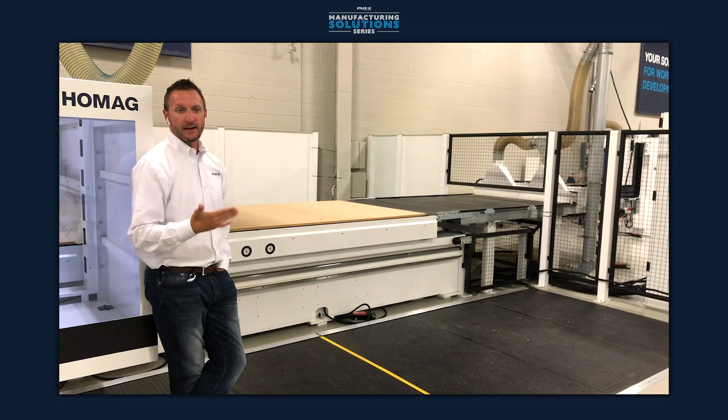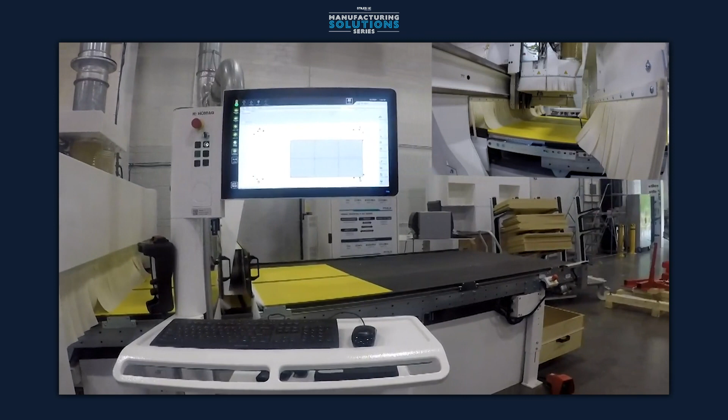The goal of automation on a nesting machine is to, in effect, get the finished parts out on an outfeed table like we see here off to my left and your right. The parts are ejected from the machine automatically. And while that work is being done on the outfeed table, the unloading, the sorting, the dust collection, potentially labeling parts, the machine receives the next sheet and is back in the cut.

Right, so your operator becomes a parts catcher, not so much a loader of the machine, unloading parts and carting while the machine sits idle. So on the other side of that, when we're dealing with the flat table machine and we're wanting to do some 5-axis, if you walk down this way with me a little bit, it's, okay, so how do I work the machine when I'm not working with full sheets? And there are some technologies in this machine that help us do that.

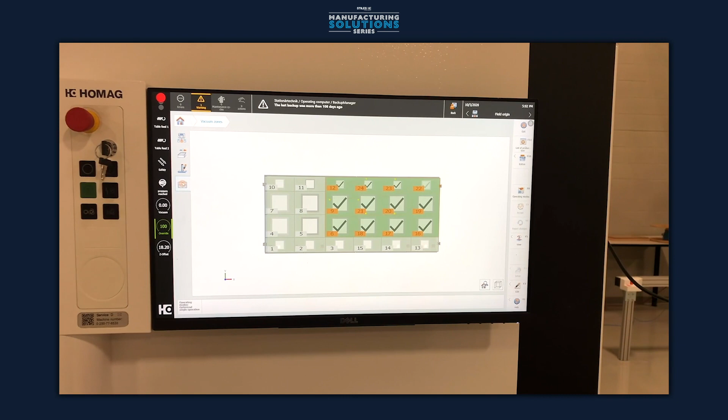If we can zoom in on the machine screen here, you have the ability to work this machine with pods. You also have the ability to fix your parts on the spoil board. So what you see there is a 24-zone matrix table. And the program that we just ran is a 4x8 sheet. Those 3, 6, 9, 12 zones were automatically opened by the machine control. So all of our vacuum is concentrated to a 4-foot by 8-foot sheet.

Let's say, for example, the next part is a solid wood clock face or something of that manner. Small vacuum zone, we would call that program up. We could reference to, let's say, the front left corner of the machine, and only vacuum zone number 1 will open up, allowing all of that vacuum to concentrate to that one zone.

So you can look at this technology as a blend of all of the technology that's taken place with automated or through feed nesting, right? This machine can also be equipped with a scissor lift on the front end to automatically load sheets 1 by 1 or 2 by 2 through the machine.

So what do I want you to take away with this? It is possible, right? High volume through feed type nesting, as well as 5-axis detail type solid woodwork. This N600 machine here is set up for that 80-20 rule, 80% high volume nesting, 20% 5-axis detail work. The demand for high-speed, high-volume nesting and 5-axis technology is growing. The N600 meets those needs.

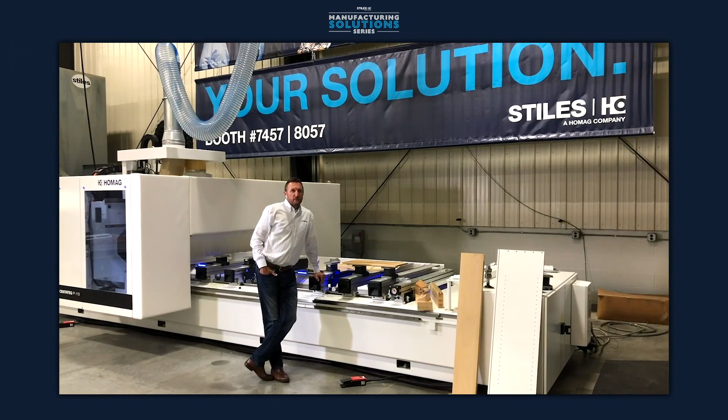What about traditional machining centers? Are we still innovating on those platforms? Let's go back to James Swanson in the other Grand Rapids showroom. Okay, so thanks for traveling with me across the parking lot of the Stiles Machinery campus to our West showroom. We're going to use a little bit of creativity here.

We're standing in front of the Centateq P110 machine, and I want to further talk about the 80-20 strategy that we talked about across the street with the N600 flat table 5-axis machine, right? So we mentioned that machine was set up for 80% nesting with automation and 20% of some of the detail 5-axis type work we see here.

The machine behind us, this is where I need you to be a little bit creative with me. Although this is set up as a pod and rail machine in our showroom, this can also be built or configured with an aluminum matrix table, where we can now put machines into the 20-80 flat table strategy, which would be 20% nesting, meaning I want to do a spoil board on the matrix table 20% of the time, and I want to do things like raised panel door, solid wood entry parts.

A few other examples of some solid wood parts here. We get into corbels and radius handrail work, which we're doing on 5-axis machines, and kind of give you an explanation of why we have two platforms, right? 80-20 nesting with automation and 5-axis as a supplement to the machine.

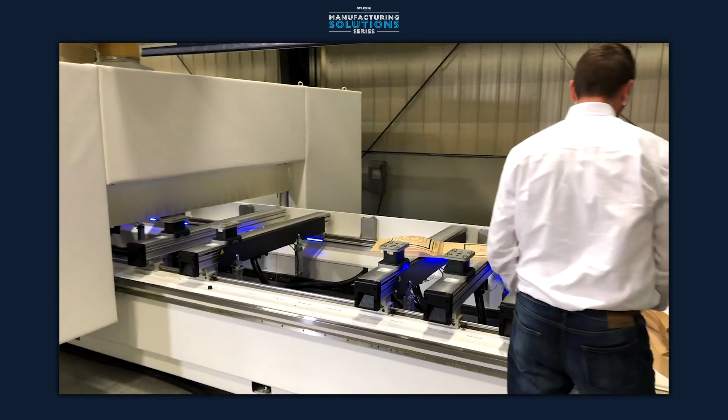So parts, whether it's some of that 5-axis solid woodwork, are coming pre-sized, or at least the large square is cut down to a smaller square, then fixtured to the machine and shaped, drilled vertically, drilled horizontally, pocketed for doing door work, right? That lock mortise type work all happens here on a machine like this.

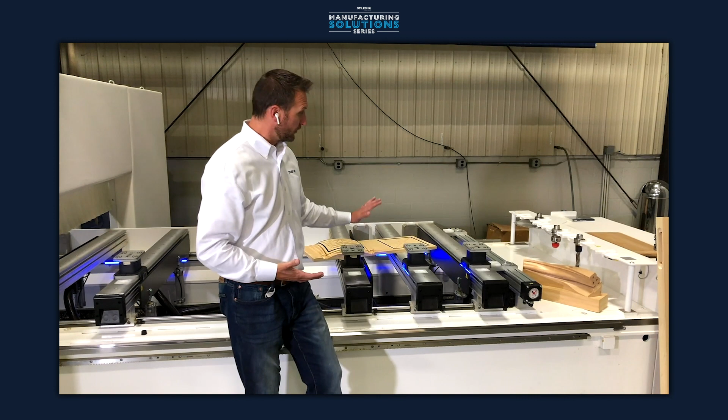In terms of 5-axis, it's kind of what is sexy in the marketplace today, right? But look at a machine like this, available in a 3-axis configuration and a 4-axis with the C-axis and aggregates to do some of that work. But we don't want to forget about our traditional cut and bore market, for which a machining center like this has been the gold standard for many, many years.

So you're looking at a side panel here, right? 8mm construction holes, 32mm adjustable shelf, plus a back groove. That process can happen on a machine like this, where we're working on this side of the table, pendulum processing, while the other side is being unloaded and loaded for the next panel. So you're working in that pendulum priority, and the machine is constantly in the cut.

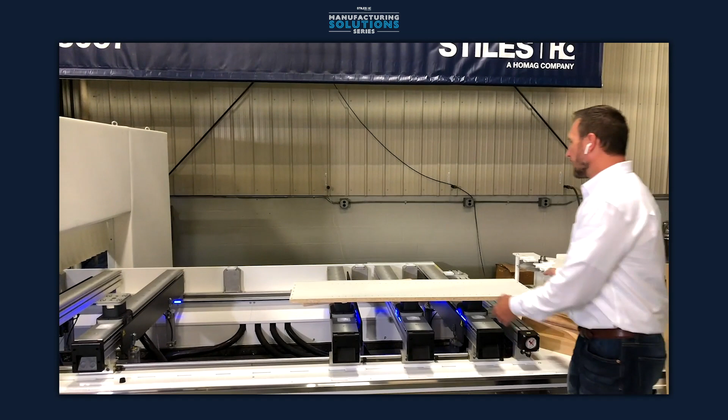This technology is not new, of course. It's been around for a very long time. As I said, it's the gold standard for machining in our industry. But David, if you'll zoom in here, we are doing some unique things. Again, when we talked about some of the machines earlier, how do we make the interaction with the operator more effective, more efficient and faster when he's not cutting parts?

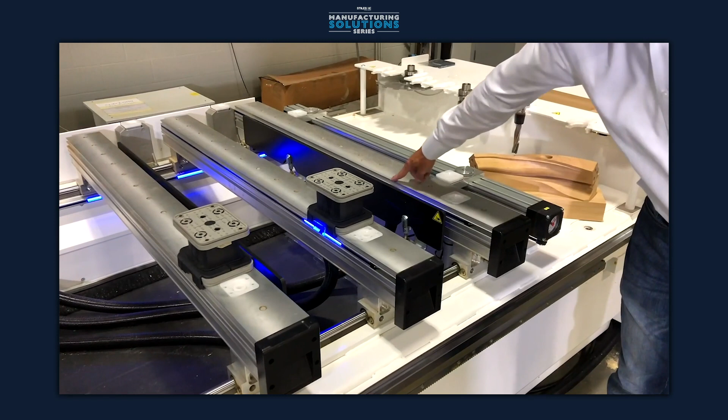And if you see here, this is set up with an LED system where it tells you where that pod goes on the rail. The blinking LED in the center is the center of the pod, right? And the width of the LED provides you the width of the pod. So the operator is thinking very little.

Stay here for a second. I'm going to go grab something different. Now I'll come back to you here with a narrower pod. And if we look at the width of this pod compared to what we have on it.

And if I were the operator and did here, right, the width of my pod is significantly smaller than the width of the LED, I would know I have the wrong pod there, right? So less thinking on the operator's part, more throughput on the machine's part at the end of the day.

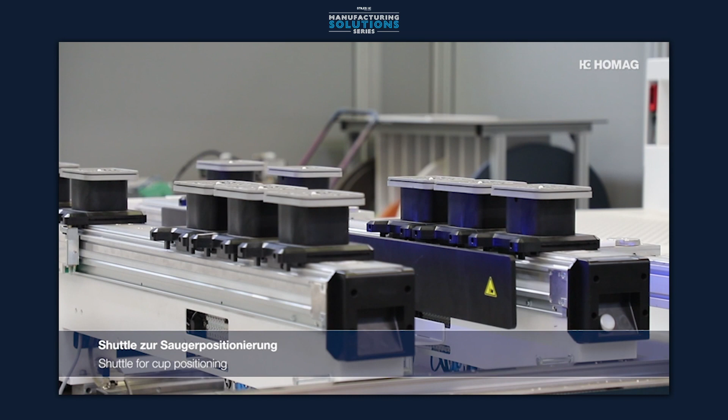So we're focused right now on a 100 series machine. New to us this year, within both the pod and rail and the aluminum matrix table machine, is the 200 series. So that brings in a little bit higher Z, a little bit more processing width in the Y-axis. It also brings in on the 200 series machine, if we're on the pod and rail platform, that market-priced auto pod. So not only are we equipping the pods and rails with LED, right, to know which size pod goes where, on that 200 series auto pod machine, the pods and rails then automatically set themselves up, further decreasing the amount of thinking and work on the operator's part.

So if we kind of close this segment here in terms of 80% machining, 20% other, we can fulfill that need both on a 100 or a 200 series CENTATEQ P series machine with the matrix table, or pod and rail with LED setup assist on the 100 series and automatic pod and rail placement on the 200 series machine.

Again, James highlights great flexibility and time-saving features like LED lights and autopods. Let's take it to John Ridgway at our High Point, North Carolina showroom to take it to the next level.

Hey folks, my name is John Ridgway and welcome to the Stiles High Point, North Carolina facility. Over the next 20 minutes or so, I'm going to provide you with an overview of one of the newest and frankly coolest machines in the HOMAG lineup, which certainly has our team here buzzing.

But before I do that, on behalf of all of my colleagues here in High Point, I want to say that we very much miss not having you join us here in person. This is one of the times a year where we would normally have many of you from all over North America standing on the elevated platforms to my right or around this facility, while our team explains and demonstrates the latest trends and solutions available at our renowned Manufacturing Solutions seminar. Sadly, for obvious reasons, you all can't be with me here today. However, be assured there will be a time when we can once again welcome you back to this fantastic facility, and we can't wait. So with that, let me show you what all the excitement is about.

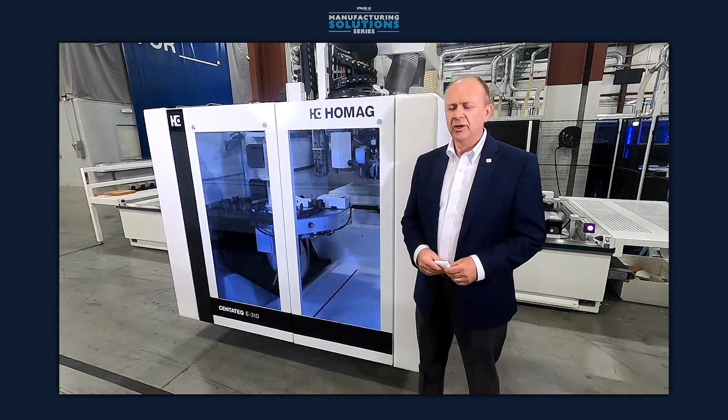So the E310 has many cool features. 3 really cool features that we're going to discuss here today are the Drive 5 C+ 5-axis unit, the new contour edge banding unit from the HOMAG group called the Power Edge Pro Duo, and the very latest version of their automatic positioning system called the A-Flex table. A lot of features, let's get to it.

So one of the most important things in any CNC machine is safety, and this machine really has some cool safety features we're going to discuss. As you notice, there are no safety mats in this machine, so I'm actually standing in an area which is being monitored by this device you see down here. That's called the Safe Scan monitoring system. What it allows is the machine can operate in a pendulum process motion while the operator stands here, and that system is scanning the area the entire time and knows where the operator stands, which allows the machine to also operate at a higher rate.

Otherwise it would be in a much slower rate. Safe Scan makes a huge difference to the overall productivity of the machine. In addition to that, we have safety fencing around the back and access doors on the rear corner to allow safe access to the machine to maintain it by the operator.

There's also a great many operator assist tools with the machine, and we're going to talk just about a few of them here in this session. One of the biggest and my favorite is the tool pickup and drop-off station, which is right here. We know from our history that one of the biggest reasons and causes for crashes, collisions, incidents with the machine is when an operator makes a mistake. Hey, we're all human, we all make mistakes.

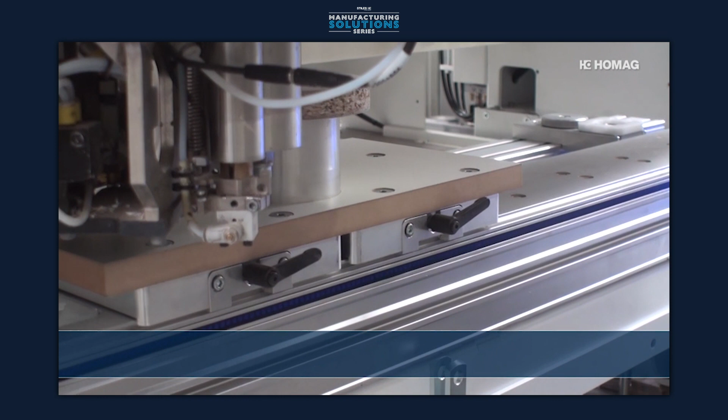Okay, so on our E310 we have a really cool feature to tell you about today. This is the Power Edge Pro Duo, and the Pro Duo is HOMAG's new contour edge processing unit. The Duo signifies that we have traditional hot melt EVA in this case and HOMAG's airTec technology all in one unit. You could also do PUR. We'd have a secondary application unit which you'd pre-fill and preheat outside the machine, and then store outside the machine if you needed to do that as well. But it is capable of PUR.

The benefit obviously is we can now do so many different types of edging, so many different applications that perhaps we couldn't do with EVA hot melt alone. We have easy access now to the hot melt granular container, which is here at the front. If I wanted to change from one color to another, I can just simply remove this or refill from the top if it starts to get low.

Other cool features of the Power Edge Pro Duo. When you contour or edge band a part, at certain parts along that contour, you need to apply different amounts of pressure depending on the radius that we're doing. On the previous Power Edge version, that was controlled by air, compressed air. This new Power Edge, what it does is the pressure along the contour is controlled by the woodWOP program itself. So we can define different pressures on different segments of the contour, which is really, really cool.

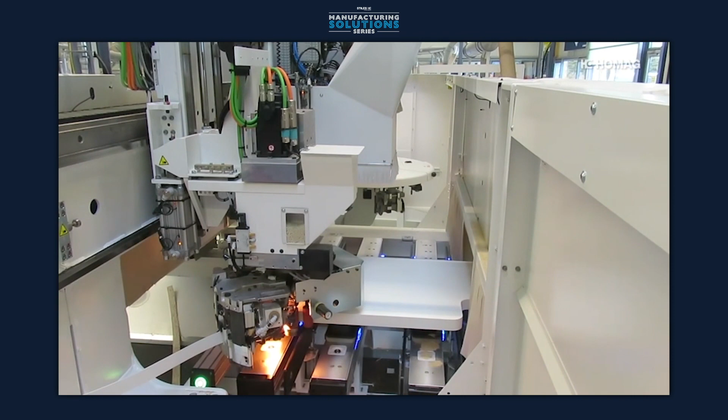Now, of course, we can also feed strips into this magazine, and this particular magazine is equipped with 2 coil change-out systems here. You can see them inside the main machine enclosure. I like that system a lot because I can have additional trays set out of the machine with my most popular edge band coils preset, and basically hot swap those back in there if and when I change over. I don't have to mess around with trying to change out the coil on the plate inside the machine.

The machine also allows you to keep track of all the parameters specific to the banding that's being applied in the controller. So if I have a different glue temperature for a different type of edge band, right? Or if I have different types of parameters for the edge band, that flexible edge sequence control software allows me to track that and apply it when I'm using the edge band during the process.

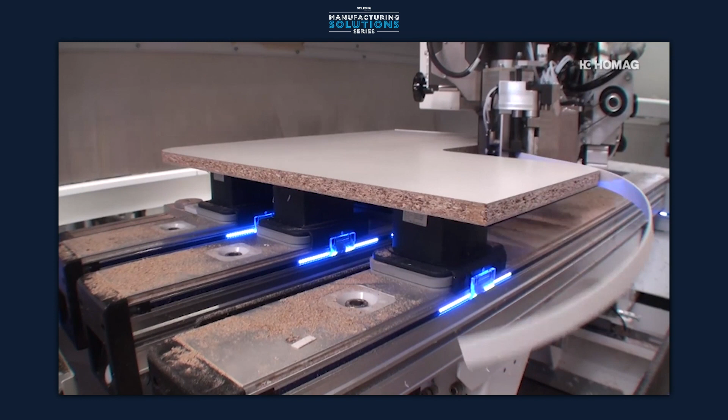The machine also keeps track of the amount of linear footage of tape that's on the roll or the coil. That way you prevent having a situation occur where you're edge banding a part and you run out of tape midstream. This way the machine knows how much is left on the coil and will warn the operator before it tries to process that part that you're going to run out of tape on that coil. This thing is really state-of-the-art technology. It really is cool.

So to continue on with our tour of the features of this new E310, I'm going to tell you now about the new HOMAG A-Flex auto positioning table. This machine is equipped with 8 consoles based on the machine length. So the automatic positioning is going to position the consoles in the X-axis and also going to position the pods along the rail. And that's not so much new.

Where the new technology comes in with this A-Flex is previously on an automatic positioning table, you'd be limited by how many pods you could put per rail. Sometimes it will be 3, sometimes it will be 4, depending on the configuration. Because this system does not use carriers on the rail anymore, you don't have that limitation as to how many pods you could put on the rail anymore.

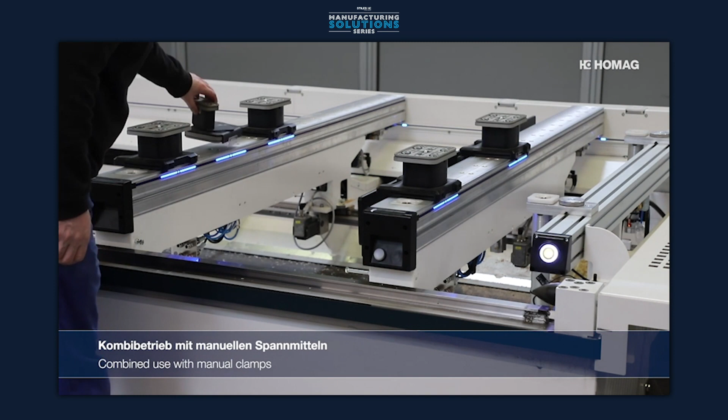So for this new A-Flex table, you can put up to 6 pods automatically positioned on the rail, and, which is really cool, you can use combinations of automatic positioning pods and manual pods as well. So it's so flexible because it automatically positions, and also allows you to use traditional 100mm high K-style clamps on the table as well. What's also cool is as the positioning system positions the pods along the rail, it'll clean the top surface of the K-table itself. So if there's any dust or debris on there, it'll clean it as it's moving those pods along. Again, you choose the combination that works best for you.

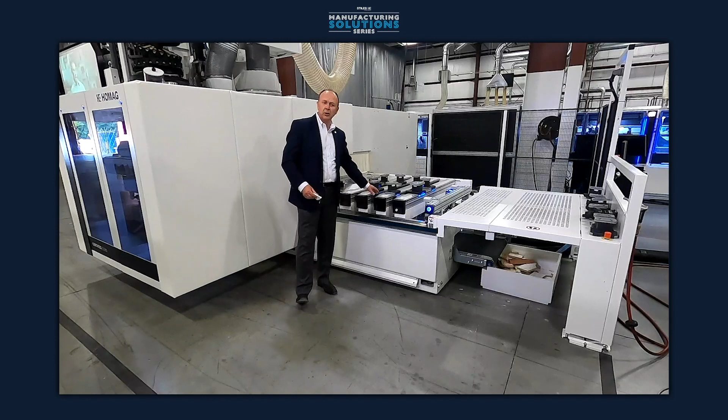As it's flexible, you also have the LED assist system on the side of the rails as well. That allows you to utilize the machine as a manual positioning table if you want to do that as well. And you could also use high and low pressure auxiliary clamping systems for solid wood processing on the same table. So it truly is flexible. The machine's also got HPL lifting rails which aid with the loading and removal of parts on the machine. And most importantly, it's fully dynamic processing capable.

And what I mean by dynamic processing is on a machining center, historically, you can have a set dimension, a maximum dimension you can machine on one side and the other before the machine becomes one single big zone. Dynamic, as you probably guessed from the term, means that the machine is flexible. It's not defined anymore. So I can do a small part here and a really long part on the other side, and the machine will still be able to pendulum process. Ultimate flexibility of this new A-Flex table.

Okay, so to wrap all the technology up on this new E310, we can't forget the new PowerTouch PC87 controller on this machine. It has a 24-inch full high-definition multi-touch display running Windows 10. Everything on this controller is driven around touch gestures.

The menus are all driven and sized appropriately for fingers, so I can just drag and drop directly onto the machine. There's a distinct absence of buttons. It makes it easy for someone to walk up to and use a machine like this. And it's a common platform with the power touch between all the HOMAG group machines.

This also uses the woodWOP programming system, which is common across all of our CNC programs, and it's backward compatible. So if you have programs from older machines, you can bring them forward to today's version of software without issues.

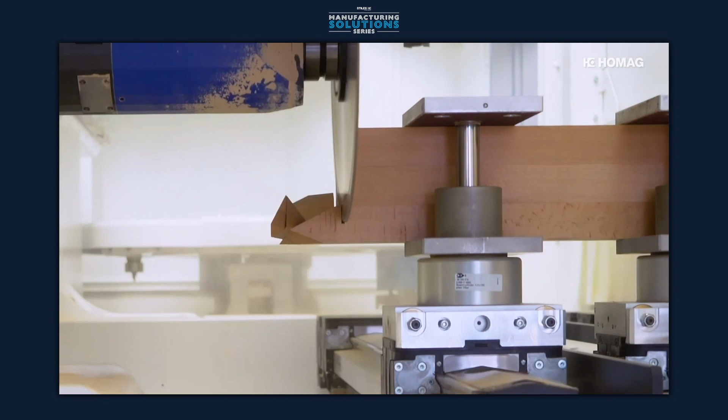So that concludes my tour of the E310. Hopefully that gave you some good information about what's new about this machine. And we're really excited about having this here in High Point, and we're really excited about welcoming you back here in the not too distant future to see it yourself.

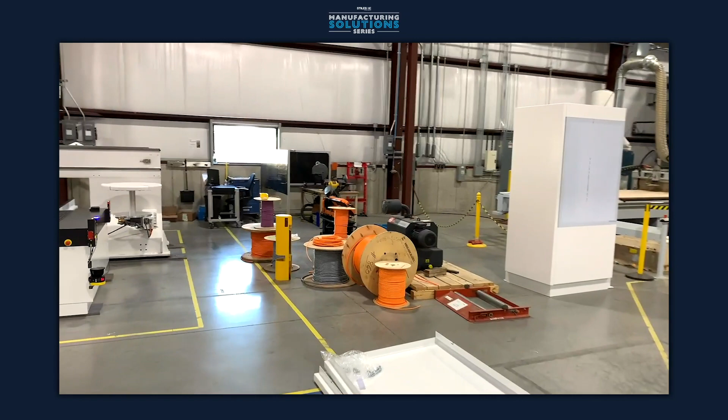And one of the things that we're excited about is our T300 twin table. We're going to drop into this cell and talk a little bit about some of the specifics about the T300, the different platforms that we're building on, and the different configurations that we're bringing to the market. And we'll just step in here for a little bit of focus on what's happening.

We're here in the T300 production cell. This is one of our larger machines here, but let me tell you a little bit about how we came to have this machine in the HOMAG Machinery North America lineup. We talked a lot about high volume nesting, high velocity nesting that James touched on. One of the things that we recognized in this market as well was that high production multi-spindle is still a requirement in North America. Old machines in the system, 4-head, 6-head, 8-head machines, limited tool changing capacity, a thing of the past.

But with the volume requirements that are still here, we had the chance to re-engineer, redevelop, and reintroduce this type of machine for North American production. This machine on the T300 platform: twin table, multi-head production, 3, 4, and 5-axis capabilities as you see here. Onboard tool changing for flexibility, flexible manufacturing and production capabilities from a fixturing standpoint.

This platform was completely developed here at HOMAG Machinery North America together with our German engineering partners, fully leveraging everything that we're doing here at HOMAG Machinery, taking into account all of the technologies that are part of the HOMAG group, including the advanced safety systems that we see traditionally on HOMAG group machines, not only leveraging the mechanical platforms, but also the software environment with woodWOP and user interfaces that are standard across the entire machine line.

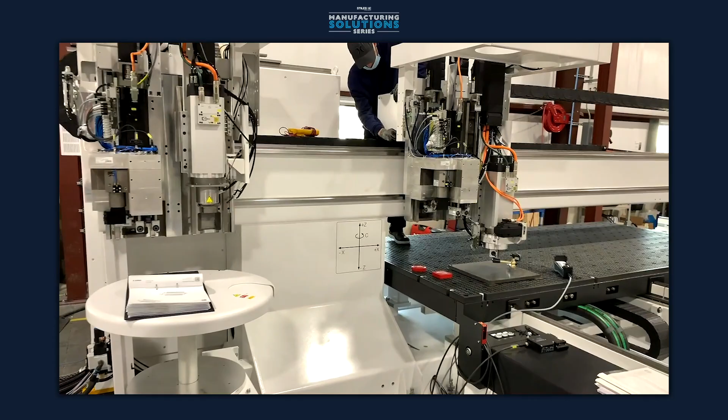From the simplest machines to the most complex, everything we're doing here at HOMAG Machinery North America is with exacting standards and advanced technologies. As a Built for North America program, T300 allowed us to fully leverage our engineering and design to create a purpose-built platform. Okay guys, so before we transition out of this area, let's shoot it over to one of our customers who's running a T300 twin 6-foot by 5-foot table machine in production doing component manufacturing.

Twin tables are double the fun, but the factory's working on more. James, what's going on over there? As we transition away from the T300 technology, we're going to stay consistent with the theme of today's event: what's new, what's different, and why it matters with today's HOMAG and Stiles CNC technology. There are a few technologies we're going to show you here in the factory, but since we're in the building, why don't I give you a quick tour? Follow me.

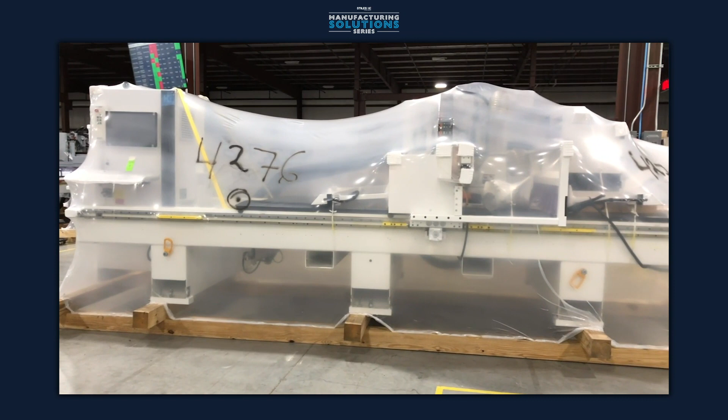So off to our right, N300 5x12 machine with a push-off system that was just packed this morning, will be shipped out tomorrow. So technologies in a manufacturing facility: not just what you build, but how you build it logistically. How do you track and how do you manage your quality through the factory? David, if you take a quick skew up there to the digital dashboard, each of our build stations has a digital queue noting what's going well, what's going great, and where we need assistance from either engineering, logistics, or production supervisory.

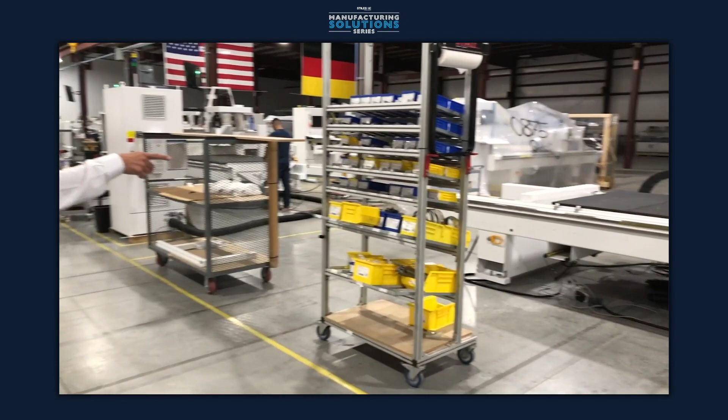Continuing our walk forward, next machine finished, queued for packing. That machine is an N500 5x12 Concept 2, so a through feed router. And then we'll just kind of rattle off a little bit what's going on. N300 5x10 standard machine. N500 5x10 with an outfeed automation solution. So let's pause here if you don't mind.

What you see here is we're often looking in the market with HOMAG Machinery North America, our US-based manufacturing initiative, to in essence serve our customers by bringing that style safety net into market segments that we previously were ineffective in or were not able to participate in at all. This machine is one of those. We're able to leverage our US-based manufacturing facility and enter a market space which we call abrasive materials. That could be a 100% Corian operation. It could be glass mat G10. It could be some different variations of aluminum that are dry cut and or some thermoplastics, right?

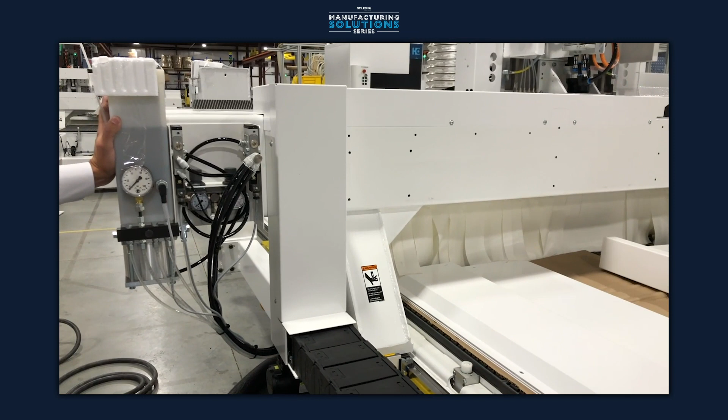So follow me around here. Let's talk a little bit about abrasives, materials protection, and what machines are required to be built like to handle materials or substrates that create an abrasive and invasive chip. So here, again, we say not mind-blowing technology, but important to understand if you're looking to sell machines and or participate in the manufacturing of abrasive materials.

So pressurized oil management. When we say invasive and abrasive materials, those small particulates enter the bearings of the machine, right? They enter the shoes. The particle is so small that we can't prevent it from entering. So we pressurize them and we flush them out to increase the longevity and effectiveness of the linear motion package on the machine. So we talk about how we leverage our US-based manufacturing footprint to bring that style safety net to another group of customers in the market, and abrasive materials protection on our N500 series machine is one of those solutions.

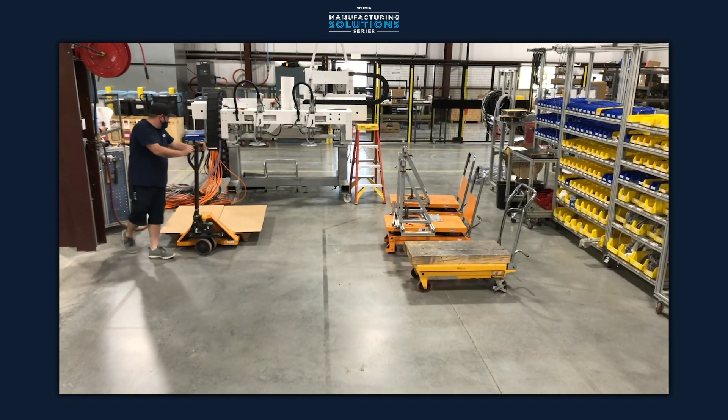So as we continue forward, pre-assembly, right? So we talk about not just what we build, but how we build it. The station off to my right is our pre-assembly station for the gantry components for N300 and N500. So what's the importance of a gantry? Well, it's the backbone of the machine. It carries your router spindle, it carries your drill spindle, and it does all of the work.

So one of our manufacturing strategies here is to pre-build that component, pre-wire it, so that when it's time to bring it to the production line and add it to the machine, it slides on, we wire it in, and it's ready to go. It's pre-tested, and the time that we spend at that particular takt station is very, very small. So pre-assembly isn't just something as important as the gantry. Pre-assembly of reference pins, pre-assembly of fence actuators, as we see here with Kanban, right?

So oftentimes when we tour the factory, we're asked which manufacturing strategy is prevalent in your manufacturing, right? Is it lean manufacturing? Is it Six Sigma? Is it Lean Six? Is it the TPS, the Toyota Production System? And for us, the answer is often yes, right? Manufacturing here in the US with the type of product that we manufacture, we pull components from each of those that best suit the product that we build and the type of worker that we build it with. So we're doing a little bit of all of that.

You'll see some stuff here in our signs: gantry assembly, supermarket assembly, which comes from the TPS. And we're constantly looking to increase and evolve our manufacturing strategy to become that 1% better today than we were yesterday.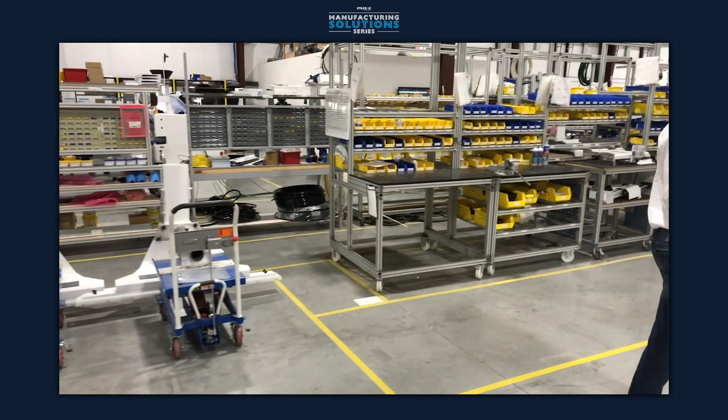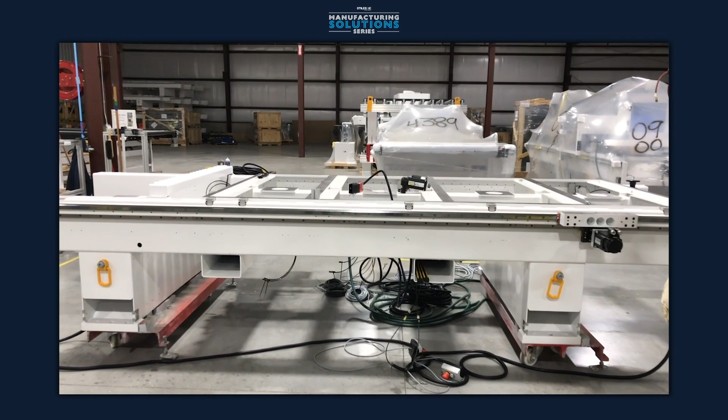If you continue to follow me through, since we are going backwards in this tour, we'll take a pause here at our first 3 stations. This is where the frame enters the manufacturing line. So these first 3 sections are what we call moving assembly. Each of these frames will move up the line on those red casters there down on the ground through each of their build stations. Once we get past these first 3, we go into what we call box style assembly, where people and parts and pieces come to the box and we assemble the rest of the machine from that position in the production line.

So what are we seeing here? Off to my right, that's a frame for an N500 5x10 machine. The machine in the middle here, N300 5x10. And the first machine coming into the production line over here is also an N500 5x10 machine. Good, let's continue on with the tour.

So now we're coming up towards the back side of the factory. We're gonna loop around. And if we had a bird's eye, if we had a drone, or if we were riding up on our crane system, you would see that the pre-assembly forms the backbone of our manufacturing facility, right? It feeds the CENTATEQ N300 and N500 line to the left. It feeds the T300 twin table line up towards the front right. And also here on the back side, we have a whole drill and dowel ABD / CENTATEQ DRILLTEQ construction area.

But before we make that turn, let's focus our attention to the rearmost portion of the factory here. This is electrical back panel assembly. They're engineered. We build them up soup to nuts here with our own people. We cross-check, we cross-reference. We build them into the electrical cabinet, and then that enters the line at the point where electrical and gantry come into the production line.

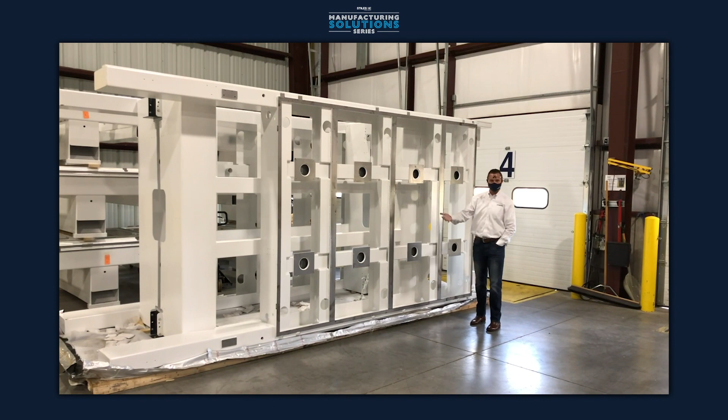So what you're seeing here, warehouse, shipping, and receiving in the back quarter of the factory. And what you see here is the next iteration of bringing that safety blanket of Stiles and Homag into the North American CNC market. So there's a board that's gaining popularity. I call it Euro board, typically 7 foot wide, 9 foot or 10 foot in length. Typically based upon that deeply textured melamine that's coming in from Europe, right?

So again, I'm very open here with Homag Machinery North America. We have plenty of strengths, but there are some weaknesses also, right? And this 7 foot platform had been a challenge for us to import from Europe, right? So what we were able to do is take the European design, the German design, put it through our R&D department here at Homag Machinery North America, and Americanize that frame design.

So, you know, moving from metric steel to inch so that it's easier for us to build here. And what is behind me are the first two 7 foot by 10 foot N500, we'll call them Euroboard nesting machines, that we'll build here later this month.

So again, taking a market segment that is growing in popularity, it's growing in volume, and then parlaying that into a HOMAG product, right, to make the effort to better serve our customers through US-based manufacturing. This is kind of a cool frame. I don't want to spend too much time on the technical here, but we laugh, right? It kind of feels like a soccer field or a football field.

The working field is so vast that it does make it difficult to move vacuum from what is typically a center plenum on the machine and maintain pressure on the edges. So here we went to a dual plenum design, so vacuum pressure through these channels down the machine, matrix table cassettes on top, secondary plenum distributes vacuum to the edges or the outer extremities of the matrix table, giving us a nice platform to have similar pressure at the center of the table as it relates to vacuum as we do on the edges.

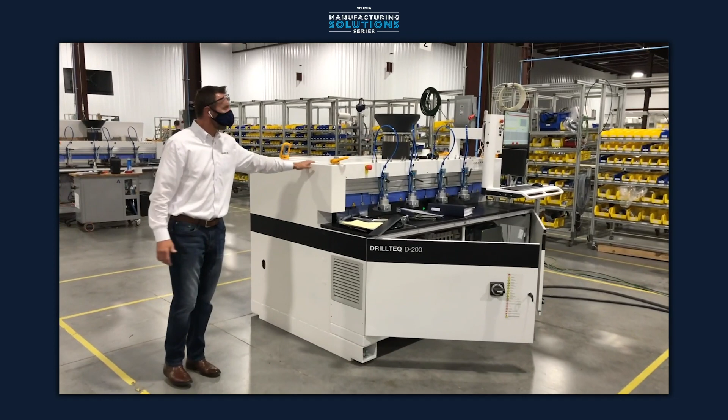So what we see here, DRILLTEQ D-200 06028, which is a 2.8 meter machine, 10-foot working field, followed by a smaller machine behind it, again D200 12 or 1.2 meter machine, 4-foot working field, and then 2 more 1.2 meter machines behind it, right? So although these machines kind of don't have the same excitement within the production line as the T300 or the CENTATEQ line does, nonetheless, they are super important for our manufacturing strategy here in the United States.

The other thing I want to do here is use our standard DRILLTEQ construction here and kind of piggyback that technology into the D510 machine we have on the floor in the Grand Rapids West showroom. Okay, so bringing in a little bit closer into the DRILLTEQ construction, I think one of our most important benefits that we bring to the market is the commonality of the software or the ecosystem within everything that we do in the HOMAG group.

So David talked about bringing the woodWOP ecosystem into the twin table, right? High volume nesting, high volume component market. We do the same on the backside of the production line with the N300 and the N500 running the woodWOP software. It's important to know that the DRILLTEQ series machines are no different. So what we're standing in front of here, this is a powerTouch control graphic interface, right, for what's happening on the machine table. And that same woodWOP file that we create and run on the T300 machine or the N300 or the N500 machine runs here as well, right?

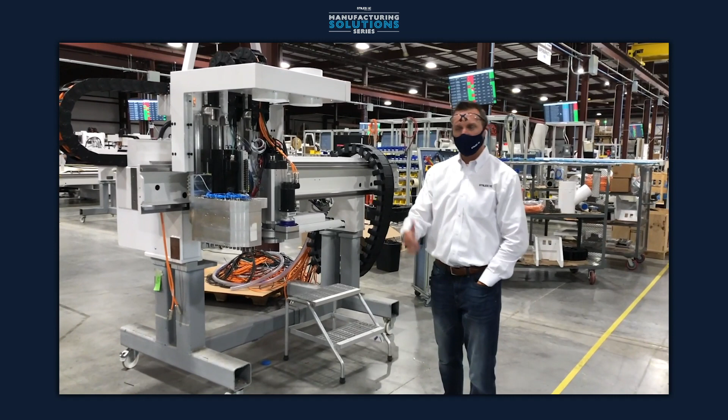So, all right, as we work our way back up towards the front of the facility and the front door, the end of the tour, I think it's important to stop on the backside here. So we're on that pre-assembly fishbone again, on the backside of the gantry assembly that we saw earlier in the tour. So just a quick little review here: gantry assembly, Homag drill block. This is an N500 level machine, so bend spindle and C-axis.

And really what I want you to see here in terms of pre-assembly is American factory, but very much has the feel of a European factory. Everything is clean, it's organized, and everything has its place. So you'll see here on a tool cart, 5S type strategies. Everything has its place. Everything goes back in its place so that the next time you need it, it's where it should be. Economy of scale of hand motion is very big in terms of mechanical assembly, and we prove it here every day.

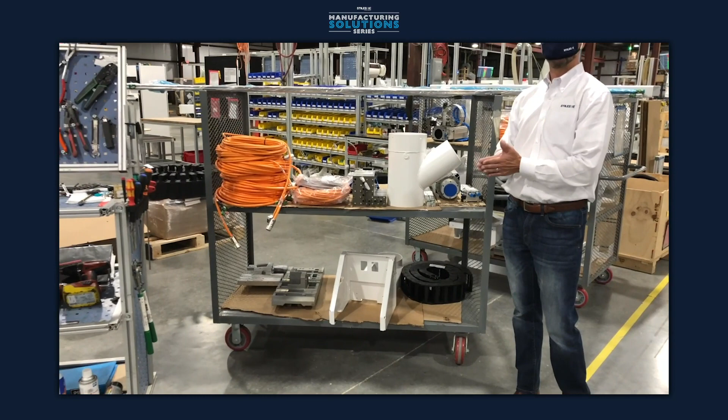And then things like just simple stuff, pre-assembly carts. Let's make sure what's on the cart is in the place that it needs to be used later in the shift. So simple organization, we live by it. If you're not an organized person, you don't survive very long here. If you buy into the system, we have fun doing what we do every day, and the goal is to be 1% better today than we were yesterday. As you can see, we're working hard to bring reliable solutions from our factory floor to your shop floor.

We at Stiles are committed to supporting you every step of the way, but we don't do it alone. Let's explore some new and existing partnerships that help us support you better. Dave, please tell us more. Okay, thanks guys. Let's transition over into another topic now and introduce a new partnership that Stiles Machinery has with Greda. Greda is a solid wood 3D CNC manufacturing specialist focusing primarily on furniture components and furniture elements. The capabilities that Greda brings to the table for us are unique in the fact that they are focused on fixturing, clamping, and programming for 3D.

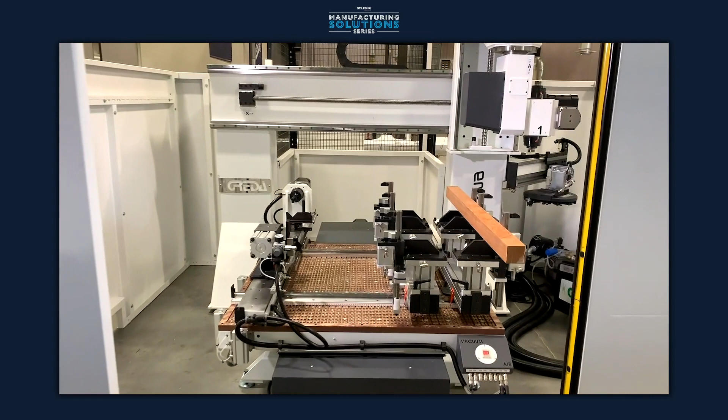We're going to take a look at the machine that we have on the showroom floor here in Grand Rapids, a new addition to our stable here in the demonstration environment. Again, showing some of the capabilities of Greda with their customization, both from a vacuum table standpoint, mechanical clamping, and full 6-axis control on a 5-axis machining platform. Let's transition from here over into a company tour at Greda to see what they bring to the table.

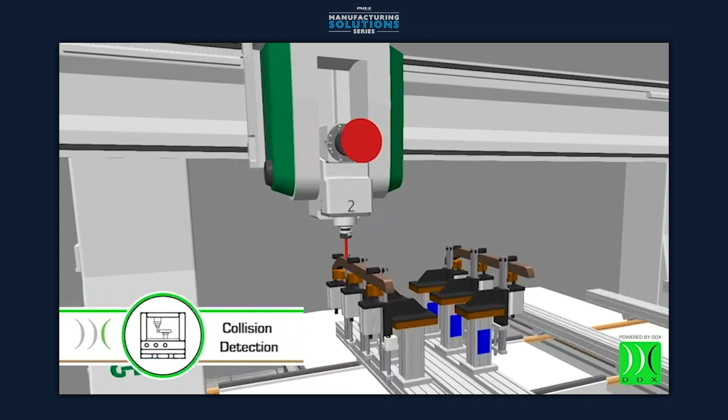As we transition into this discussion from your standard nested base manufacturing into the topic of high volume, high velocity nested base manufacturing, we've just seen and determined in the marketplace that there is a need for more throughput, multi-spindle processing on a platform similar to what you'd see in traditional nesting, transitioning from single spindle, multi-drill flexibility to multi-spindle, multi-drill production process flow and high velocity.

Heian is a specialist in this type of area as a custom machine tool builder, partner of Stiles since 1987, more than 30 years, in the market of CNC since the late 1960s, a world leader on this platform, developing custom machine tools around the world, more than 1,000 machines installed and running in the North American market alone. Let's take a look at some of the high velocity, multi-spindle, CNC processing, nested base solutions that Heian has to offer.

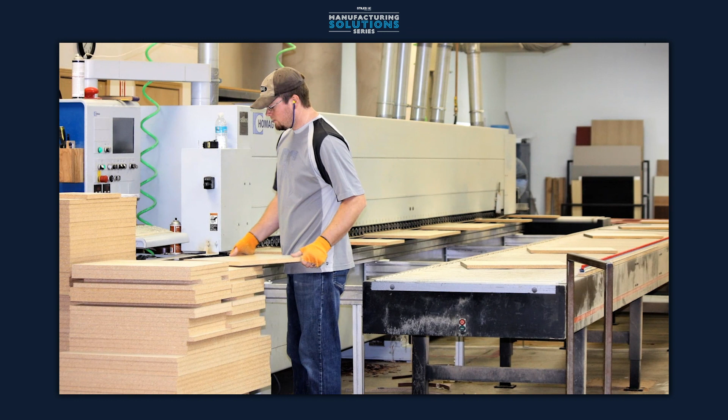HOMAG has led our industry in solving these challenges with the integration of industrial robotic solutions and has already revolutionized panel dividing. Furthering that commitment to creating effective automation solutions, Stiles Machinery is proud to announce our strategic partnership with Automatech Robotik, designed to blend trusted HOMAG CNC equipment with proven advancements in robotic part handling. It's CNC machining like you've never seen before.

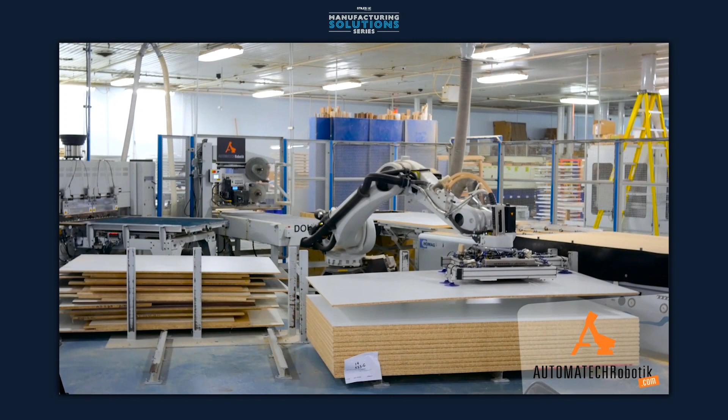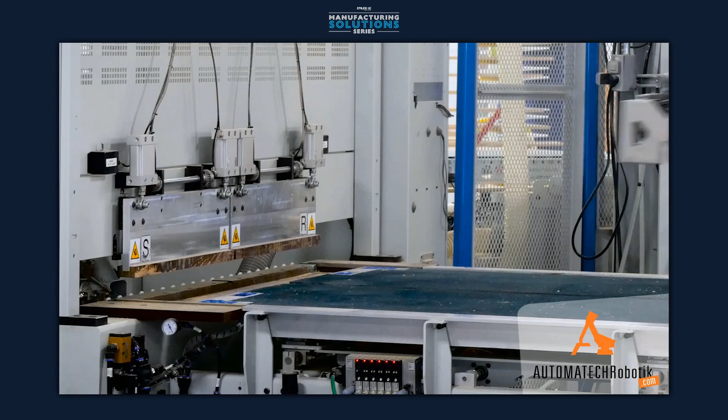Headquartered near Quebec City, Automatech Robotik has spent over a decade perfecting integrated robotic solutions for the woodworking industry. Their goal? Simplify robotics. We try to simplify robotics so the end user of the system doesn't have to know robotics. Our robots are directly linked to database, directly linked to drawings, and the robot auto-programs itself when you need to do a batch size 1 production. Successful kitchen cabinet, office furniture, flooring, MDF door, and countertop projects have shaped their approach.

We learn how to optimize an equipment. We learn how dust can affect productivity of a robot. We learn the importance of quality control when you integrate different processes together.

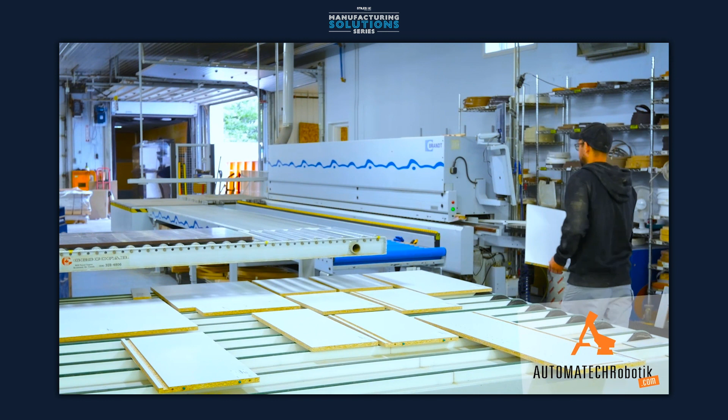Automation is not about eliminating trusted and loyal employees. It is about leveraging your current workforce to reach their full potential, enabling your business's survival through continued market shifts, avoiding controllable downtime, and fueling your competitive advantage.

Together, Stiles and Automatech Robotik have developed 4 key solutions that blend CNC and industrial robotic technology to achieve these benefits. The first is the horizontal drill and dowel solution known as Albert. The primary targets: consistency and speed.

Using a KUKA robot and an integrated smart table feeding system, this solution can queue and process up to 4 pieces simultaneously. Preloaded programs now automatically drive production to the machine, allowing for flexible and easy doweling of parts as small as a cell phone and as large as full material sheets.

In a standard manually operated drill and dowel system, there is an entire process behind what appears to be a simple operation. Functions such as part loading, program loading, part transfers, and waiting for material all happen outside of the machine's control. With an experienced operator, this process can be optimized to roughly a 65% operating efficiency. With the Albert system from Stiles and Automatech Robotik, your doweling solution can run up to 90% efficiency.

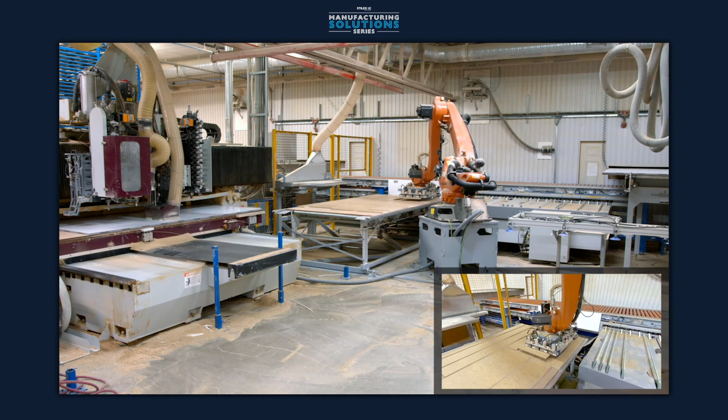The second key solution brings the same ArtBeat philosophy to nested-based routers. Both customizable to new equipment and retrofittable to many existing technologies, there is unlimited potential to optimize your nesting operations. Automatic loading and unloading can save you hours in production time, as well as reduce opportunities for human error or injury, all of which translate to a quick return on your investment.

These robots are so fast, there may be times when the system is waiting on you or other equipment to catch up. Our third solution, Harmony, can maximize that downtime by seamlessly harmonizing multiple machines in a single automated system. Now, a single robot can load and unload a nested-based router and a horizontal drill and dowel machine, and then transport parts to an outfeed conveyor, passing them along to the next phase of production.

Easily integrate CNC equipment with edge banding machines and storage and retrieval systems into a single cell. Software even optimizes manufacturing by sequencing to avoid bottlenecks and increase productivity.

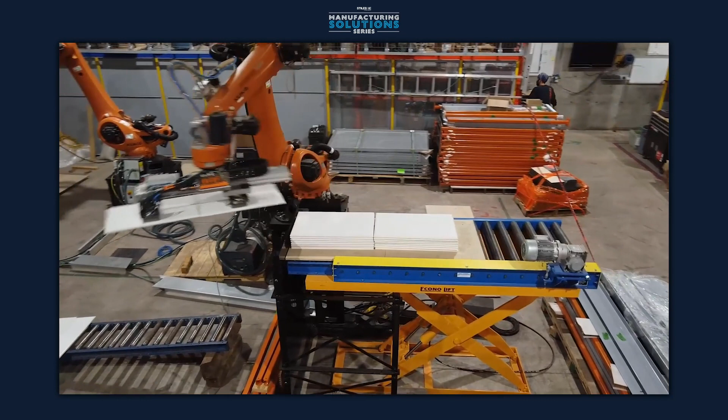Finally, the AutoMan 1 system is designed to handle multiple parts within a single motion. This innovation optimizes large batch processing by loading and unloading through-feed type equipment with minimal movement. AutoMan 1 has the ability to scan, identify, dimension, and analyze parts without error, improving accuracy and production throughput.

So why Stiles? We want a well-run and structured company. We really want to increase our reach across North America, and this is what I like about Stiles. We want to do the same things, but we know that it takes time. I want to find the right customers that will allow us to bring a long-term solution to the marketplace. Stiles is proud to partner with Automatech Robotik to transform your business through the power of industrial robotic technology.

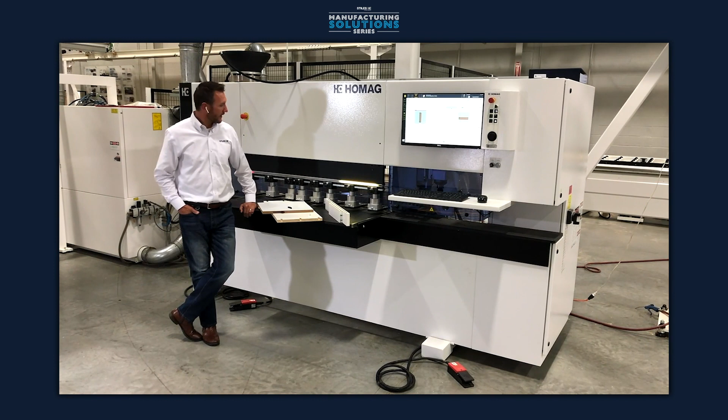Before we wrap up today's episode, James, you mentioned the D510 at the factory. Tell me more. Thanks for following me over to the Grand Rapids West showroom, where we'll focus a little bit on the next technology we want to talk about here. This is the HOMAG DRILLTEQ D510 series. We'll start by saying drill and dowel machine.

Those of you that were with us 2 weeks ago when we did the panel processing cell with the focus on more for less automation, this D510 platform definitely subscribes to that theory of more for less. Not only is it a horizontal drill and dowel, it also has some increased automation that brings some flexibilities and features to you as the end user.

5 horizontal drill spindles, right, for increased flexibility in drill diameters without setup. 5 vertical drill spindles, same thing, right? If you're doing construction holes in 8mm and you want to load it up with 8s, or you're doing doors and drawers or cam type construction where you may have a 20, a 10mm, a 35mm hinge cup. All of that can happen here on this platform with very little setup.

And then we start to see not just speed and flexibility, but truly more operations that you can carry out with a machine like this. The machine is also equipped with a vertical and horizontal router motor, right? It can take a router bit. It can also take a saw blade. So now we start to see on a platform like this, not just drill and dowel type application, but more of a machining center type functionality.

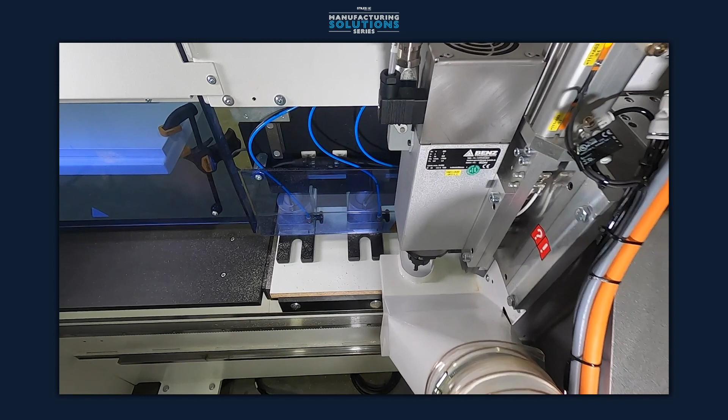If we can talk a little bit about that, there are some construction methods and things that are happening in the marketplace where solutions that are available in the market maybe fall short or take up 3 or 4 times the floor space here. So a few applications that I'd like to talk to you about here.

Clamex, some of the Lamello products. You see this little half moon type connector here. Very flexible, very strong joint, but it requires kind of a slot, a tapered slot or a radius slot in the edge of the panel, as well as the surface of the panel to make the two joints come together. You're able to do this connection here with the vertical router motor carrying the Lamello blade.

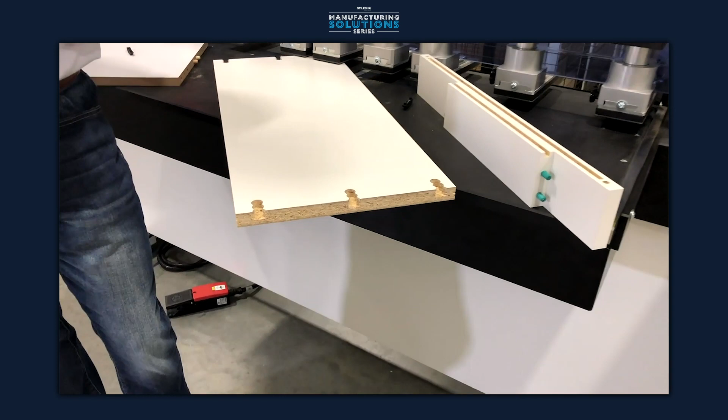Other things that we'll start to see, another Lamello product, Cabineo. If you kind of zoom in on this, we call it the Snowman. Another toolless type connector. This little piece fits in the Snowman that's drilled on a machine like this. It snaps in, and then your mating connection is just a pilot hole, and that is connected. So you're starting to see, and there are many, many applications, not just the Lamello product.

And then some other stuff that is pretty unique here, we're starting to see 5-piece melamine door construction become more popular. And it's typical to do this type of groove and blind groove type stuff on a pod and rail machine, right? Makes sense. You have the ability to do it, but your surface area for actually fixturing this part is pretty small. And when we're moving from different rail thicknesses and different rail lengths, you've got to set up your pods and your rails on the machine. And in some instances, it takes more time to set up the pods and rails in the fixture than it does to actually machine the parts.

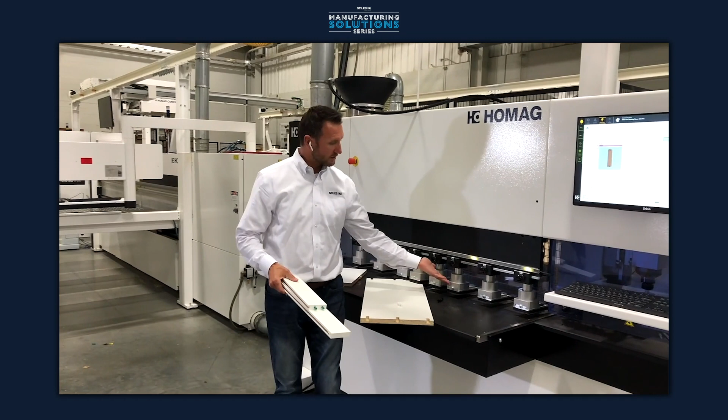So here on a machine like this, zero setup, the clamps are always fixed, and you're doing grooves, blind grooves, your 8mm construction holes, as well as your dowel insertion on a machine like this. In terms of flexibility, it's not just the product that you can manufacture, but we're also trying to affect the relationship of the operator with the machine in terms of how effective can the operator be working the machine when it's not in the cut, when it's not drilling holes, when it's not routing.

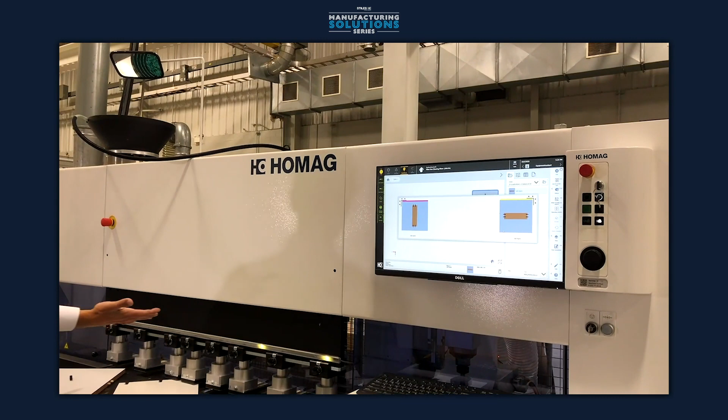You see here, this is a feature called the IntelliGuide system. So what this is detailing for the operator: that's the width of the next part that is to be loaded to that zone. If we contrast it down to the left side here, this is the width of the part to be loaded to this zone. So not only does he have the direction on the graphical screen, but as he gets up to the machine, if I'm trying to load this part to this zone, I get a visual cue that I'm wrong. Climb over my mess here. If I'm visually looking to load this part to this zone, I get a visual cue that I'm doing what the machine is expecting me to do.

Some other cool stuff happening on this machine, this clamping carriage here, full servo control. So if you're a manufacturer that does half-inch drawer fronts, then you move to 3/4 cabinet sides, and maybe you do 1 inch or 1 1/8 inch countertop or work surface type work. As the incoming program notes the thickness of the incoming part, the machine will cue you to come over here and push this little button. If the machine was active, it would be flashing. You hold the button down, and the entire clamping carriage comes up to the next elevation. We don't have to move each clamp individually up and down, or left and right for that matter.

So in closing here on the D510, the goal is flexibility, right? The goal is to do more on a small footprint platform. And these few here are just a few examples of what you can do.